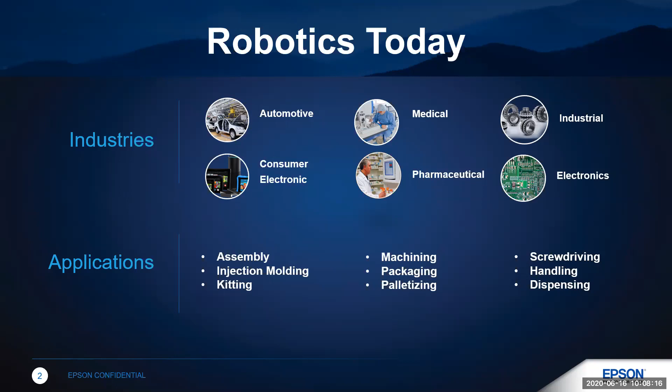And if you're going to assemble something, you have to have parts, right? You can't assemble something without the parts. So that gets us into this question of why are you talking about parts feeding? Well, in a nutshell, all different parts or products that are manufactured are made up of smaller components or parts. In order to make these products, you need to pull in the individual parts and assemble them in some way. So if you want your automation process to be successful and efficient, you need these components available for quick access, and they've got to be available in an organized fashion.

If we use, say, an example cell phone, there are literally hundreds and hundreds of parts required to build that cell phone. Same thing goes for pacemakers, hearing aids, or even hard drives. In all cases, there's typically a lot of different parts required, and the parts need to be presented to your robot in an organized and consistent position so the robot can go in, pick up the part, and do something with it. This process of making parts available is called parts feeding. As I mentioned when I started this presentation, parts feeding is one of those things you just take for granted, but it's a vital topic to automation. So this is what we're going to be covering today.

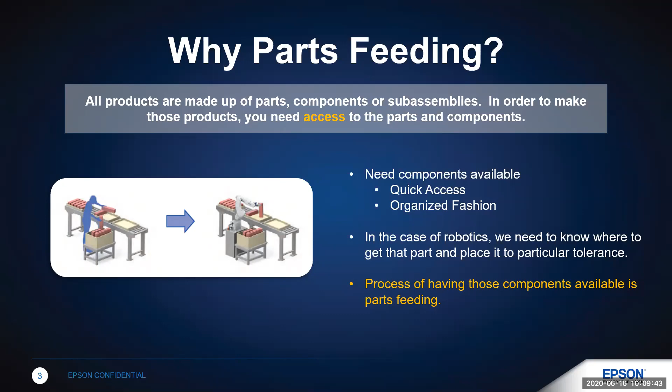Before we dive in deeper, it's important to talk about one aspect of parts feeding, a term known as singulation. During a manufacturing process, often you'll receive something like a big bag of parts. This bag of parts might be useful to a human. You receive this and use your hands to open the bag, then use your eyes and fingers to find a part and pull it out one at a time. Then you use your fingers to orient that part and do something with it, and then you go off.

At a high level, applying robotics to this process is really no different. Yet to start, typically what's required is the singulation, or separation, of all those parts from the bag. You've got to make sure they're separated. Once separated, they can be individually found with a vision system or machine vision, or they can be singulated using bowl feeders so the robot can go in and pick up the parts one at a time. So when we discuss parts feeding within the context of automation, spreading out the parts so you can access them one at a time is an important concept. This is known as singulation.

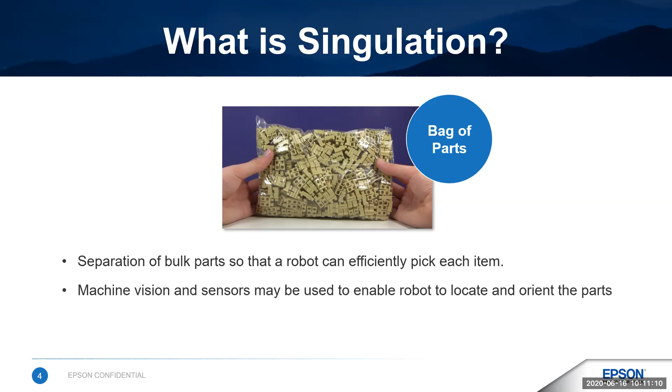Here's where we're going to go in this presentation today. We're going to start off by going through some of the key things you should consider when selecting the right feeder for your application. Next, we'll talk about the different kinds of feeders. We're not going to cover all of them, there's a plethora of options out there, we'll just cover some of the more common feeders used today. Third, we'll cover some of the trends driving parts feeding today and what we've been seeing at Epson. And finally, we'll provide you with some guidance on how to get started.

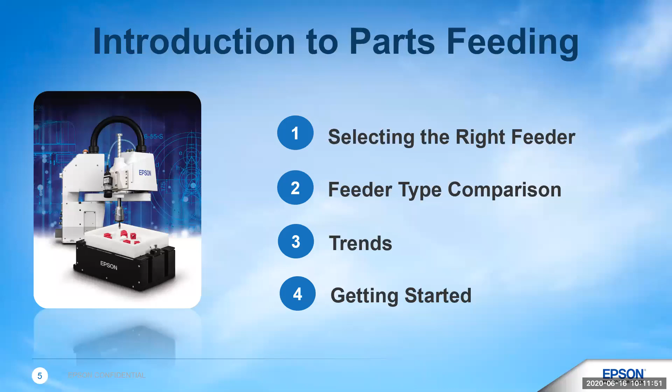So first topic, selecting the right parts feeder. For this topic, we're going to take a look at and give you 5 key areas that you need to consider as you begin to think about which feeder you want to use. These are important considerations because there are definitely a lot of choices that are out there.

So it's important to do your due diligence up front. And in no particular order, you want to be thinking about what's your part type? What's that part type's complexity? What are the future needs for your parts? Don't just think about now, but be thinking about 3 years out, 5 years out, 10 years out. What's your part mix? A big part of what we will address is volume versus variety or changeover.

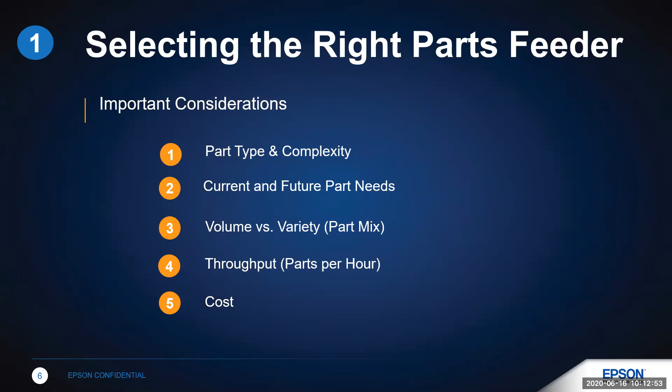And that brings us to throughput. How many parts do you need in an hour? And of course, last but not least, there's always cost. So you're always thinking about the cost of the system and your ROI.

All right, so part type and complexity. Some of the things that we want to think about when considering part type and complexity is, what is the part? Is it a simple part with, say, 6 sides like a block? Does it have multiple sides that the part can fall on when fed? What's the part length? What's the part width? What's the thickness?

How about the material? Metal parts are, of course, a lot heavier than plastic parts. So moving them around in whatever feeder you have takes more effort. Rubber parts, as another example, they can tend to stick together and can present movement problems on a vibration tray.

The slide here lists out just a few examples of parts. And as you all know, there's a gazillion parts that are out there, all sorts of different types, fasteners, clips, and connectors. But here's the thing you really want to watch out for. Things like clips or parts that have different kinds of grooves or protrusions can potentially get stuck or bind together.

And remember the topic we started off with, singulation. It's really key. You want to be looking at your parts through the lens of singulation. Can you separate the parts out?

Simple parts, so take, for example, that block, have typically very fast throughput. More complex parts can be a little slower and sometimes require special tooling or take some special setup. When we start to look at part complexity, such as a part with protrusions, this can cause the part to have multiple possible orientations. That can impact singulation.

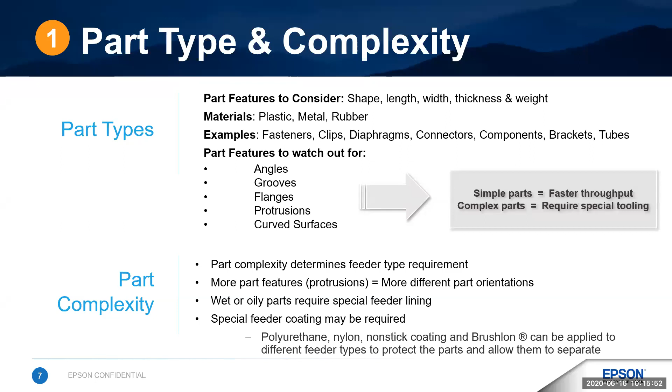So an important takeaway here is make sure when you're looking at all this and you're considering part type and complexity that whoever you work with, whatever robot vendor or parts feeder supplier you have, will go ahead and take the time to give you that confidence that you will be able to singulate those parts. It's an important topic I'll come back to later, but make sure that you do the testing and make sure whoever you work with helps you with that.

Next, you want to consider both your current and your future part needs. This is really something that you want to think about when you're considering your feeder type mechanism, because you're going to spend some money on this. You're going to have some investment in time as well. So what's important here is not just to think about what you may need for the next, say, 3 months for a given project. Think about what you might need down the road several months later.

So let's bring back the cell phone example. As you all know, probably all too well, cell phones transition quite a bit, right? It seems like every 6 to 12 months, you got a new cell phone coming out, new version. So after a period as short as 6 months, you will likely need a different set of parts for that cell phone.

You don't want to get a feeder that you end up having to throw away or not be able to use a year later. Ideally, you want to get the maximum use out of your feeder investment. So make sure you think about your current and your future part needs.

You also need to consider high product mix that requires high changeovers versus having parts that you will just keep making over and over the next 5 to 10 years. If you're in the automotive market, for example, the typical trend is that they will make the same part for 3, 5, even 7 years.

But in the electronic space, there's a much quicker turnover or changeover in the products, where every new product is introduced with new parts. And those new parts need a feeder. That feeder either needs to be new or needs to be adaptable so that you can adjust to the changing trends in your parts.

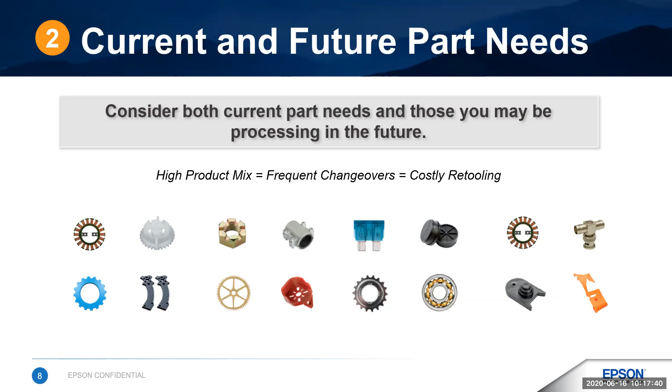If you have a high part volume and a low part mix, then very commonly a bowl feeder will be used. They're very quick. On the other side of the spectrum, if you plan to change parts every 3 to 6 months, like that cell phone example, we even have customers changing weekly, things we see with our applications department here at Epson. Then a flexible feeder might be the better option.

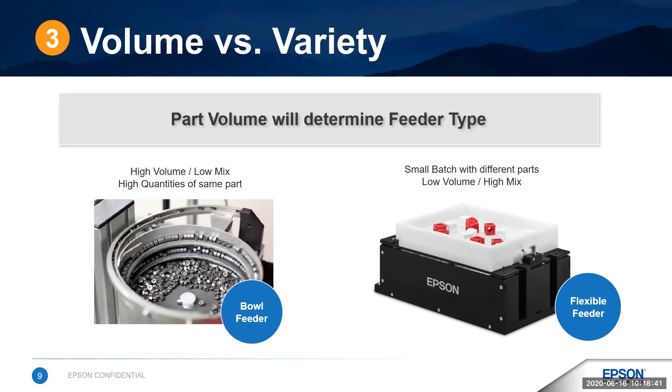So as I mentioned, we'll get more into depth into each one, but just think about what your volume and your variety mix needs are when you're considering your feeder.

Now let's talk about throughput. Here are some of the trade-offs to consider. We talked a lot about this in our Automation 101 presentation: cycle time or speed, precision, and flexibility.

So in making those trade-offs, you want to make sure you think about what is your highest priority. And that might vary application to application.

So let's say, for example, that your highest priority is the creation of 1 million parts per week. You therefore require that throughput be very fast. Additionally, in this process, the precision for the product relative to some other applications you might be working on is not as critical. So you, as a builder or as a customer, are able to reduce precision for the benefit of increased speed.

Finally, you need to think about how often you will be doing changeovers. Different parts may require different throughput and precision levels. That is the flexibility part of the equation. So be thinking about these 3 elements and what your needs are.

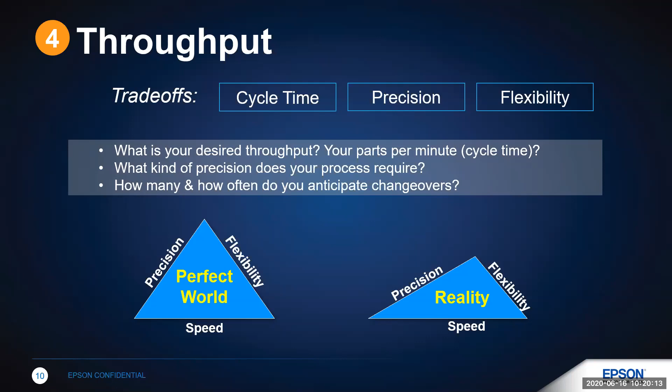Last consideration in this section, and as I mentioned, last but not least, is cost or total cost of ownership. Let's say, for example, we're building a generator. The generator's got 9 different parts that are required to build this generator, and so we have 9 different parts and we need to feed those.

If we're using bowl feeders, for example, bowl feeders can range $20,000 to $40,000 a piece. So if we use the low end cost there, we might be spending upwards of $180,000 for all those bowl feeders. If we're required to build the same product with the same parts for the next 5 years, and during that time we have to build out millions and millions of the same generator, the bowl feeder is definitely the way to go here.

However, what if we need to change these parts every year or every 6 months? And when things change, maybe the screw type is going to change. Maybe a gasket will change. Maybe some other piece will change at some point.

And so when this happens, we will very likely need to take the bowl feeder out and bring in a new bowl feeder, and that will cost us even more money.

An alternative option is to use a flexible feeder. In using flexible feeders, we can make a little programming change for the vision system to find the new part, and now the robot will be able to pick up the new part. This presents a flexible solution without the big cost of purchasing a new bowl feeder each time you have a new part.

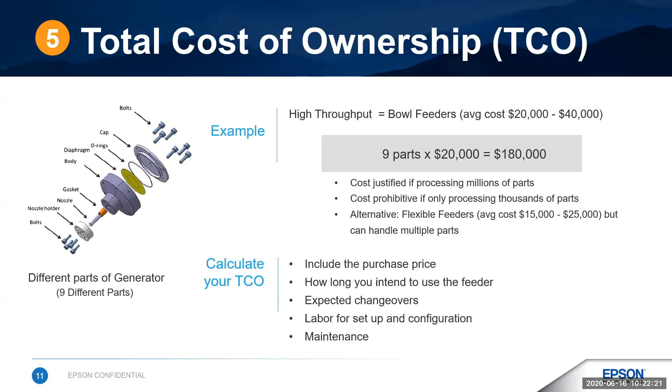So when calculating your total cost of ownership for your given application, make sure you include all these different factors. Make sure to include not just the purchase price, but factor in how long you intend to use the feeder, how often you will change parts over, or how often you'll have some sort of changeover occurring. Some feeders take more setup, some take more maintenance than others, so don't forget about those costs as well.

All right, so those are things to think about as you look at feeders. So in the second section, we're going to take a look at some of the different feeder types that are out there. And as I mentioned, there's a lot, right? So this is just some of the more common ones that we see.

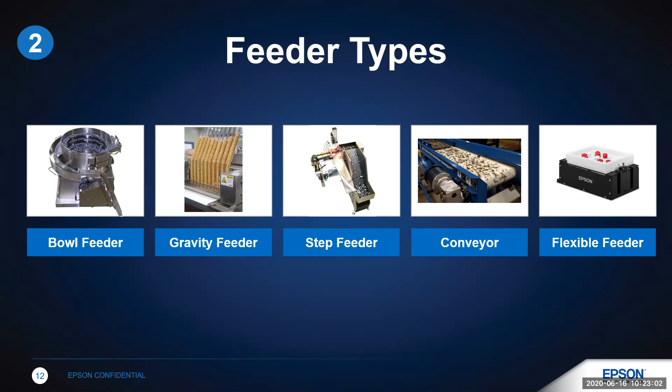All right, so first off, bowl feeders. Bowl feeders are definitely the champion when it comes to making sure you have a part available so that the robot can continuously assemble or continuously do something with that part without any lag in time. Bowl feeders typically work through vibration. So parts are dropped into the center of the bowl and they vibrate around the outside along a track.

Bowl feeders are custom made by literally gurus. Folks have been doing this a long time that really understand how to make the parts fall back into the bowl so that they were properly oriented when they are fed and presented. The beautiful thing about a bowl feeder is that there is always a part waiting for you. As such, the robot can have very quick cycle times.

However, in terms of cost, bowl feeders are more on the expensive side. They have to be made custom. The changeover is okay, but you do have to move from one bowl feeder to another as each feeder is made for a specific part.

So this brings us to part mix. Again, a bowl feeder typically works with one part. And here's where the problem comes in. If you have to change that part just a little bit, oftentimes you have to change the bowl feeder. So if you need super high throughput, bowl feeders are the best option.

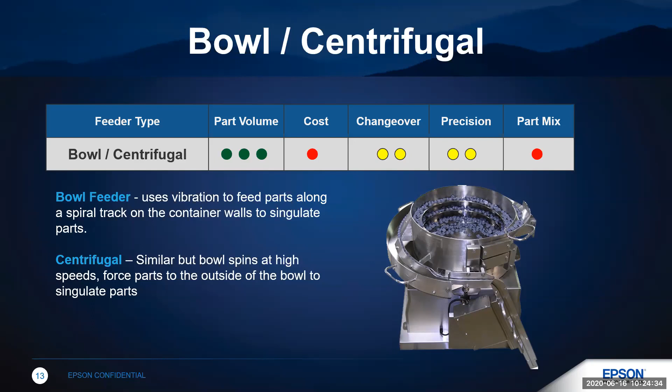Parts get dropped down and then they sit where they lie. But if you're doing a food application where changeover, precision, and part mix are not a super high criteria for you, a gravity feeder might be something to consider.

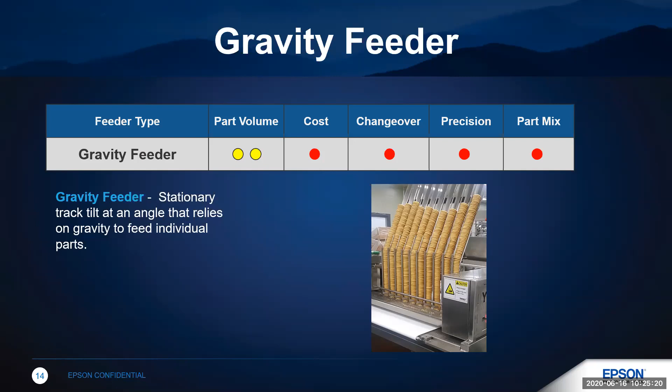So third, let's shift to step feeders. These are typically used for bringing up bulk parts. So you're not typically singulating down to one particular part. You are more pulling out a bunch of parts at one time. Step feeders are used to pull parts up to a vibration feeder or possibly a conveyor.

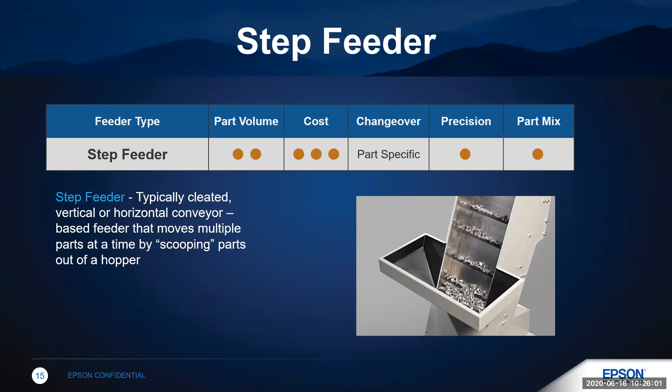Changeover is an area that conveyors really excel at, because you can change parts from part A to part B very easily, as long as you have the software already in place for the vision system to identify and pick up the new parts and the required grippers. So on the changeover and part mix side, big thumbs up for conveyor tracking.

Excellent solution. In terms of part volume, you will need to go a little bit slower versus a bowl feeder, because you are picking up parts off a moving conveyor belt. One of the things you give up as well is precision. You can fix that by adding an upward camera. You can pick up the part and move it over the top of the upward camera to see where it's held by the gripper and then go and place it, which would certainly help with your precision.

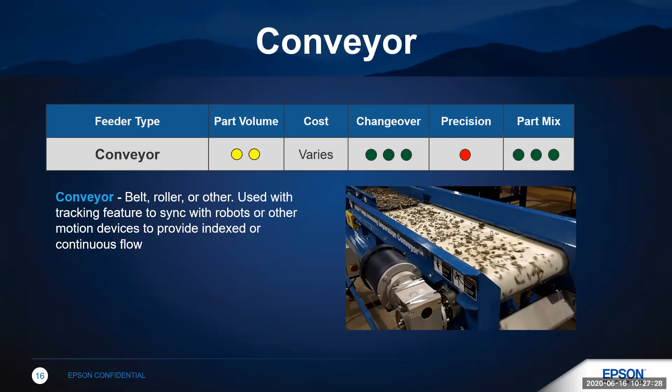However, even with that, one of the disadvantages is that the part volume does not compete with bowl feeders. Bowl feeders are usually the speed champions, while flexible feeders are better at handling changeover. Cost is also an advantage, as you can use the same robot, the same vision system, and the same flexible feeder for multiple projects.

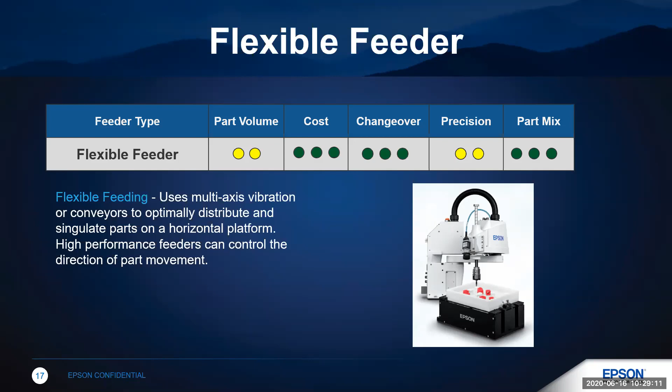So in summary, here's a high-level comparison of the different types of feeders, things to think about as you evaluate your projects and what you need. Bowl feeders, as I mentioned, do very well with throughput and precision, but have disadvantages in terms of cost and part mix, as they can only work with one part.

Gravity feeders are average with throughput and cost, but are still very specialized types of feeders. Step feeders are more for moving a lot of parts at the same time. Conveyors are used in a lot of applications—changeover and part mix are excellent, throughput is good, but not necessarily as good as a bowl feeder. And finally, flexible feeders excel when you have high part mix and low part volumes. You'll give up a little on throughput versus the bowl feeder, but where it gains is in changeover and part mix.

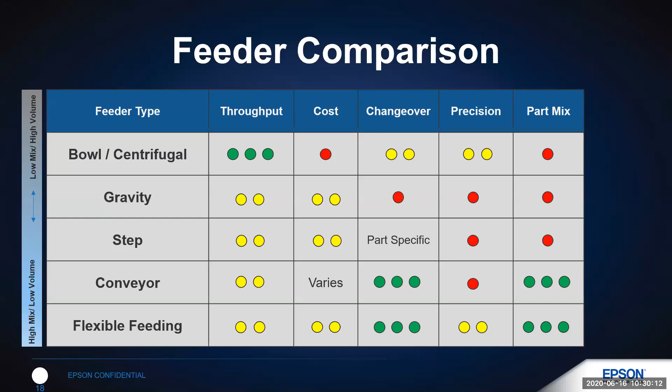All right, trends driving flexible feeding. I want to cover some of the things that we've seen, some of the things that probably you have seen as well, and considerations as you move into the space and look at your different options.

Flexible feeding is becoming much more common today versus say 10 years ago. One of the factors driving this is mass customization, and we're seeing much shorter product life cycles than we did 10 years ago. Products, if we're looking at that cell phone example, might be 6 to 12 month runs, and then the product changes—maybe a different color, a different configuration, or a different size. Cell phones are a really good example of mass customization, changing with high frequency.

Unique products like this with shorter cycles are what's really driving that need for flexibility in your automation.

Another trend is miniaturization. We are continually making things smaller and smaller. Think about a car cell phone from 25 years ago versus what we have today. I have visions in my head of Gordon Gekko in Wall Street walking along the beach in the 80s with that gigantic cell phone, right? And think about what you have today with your Bluetooth headsets and all that. Dramatically smaller.

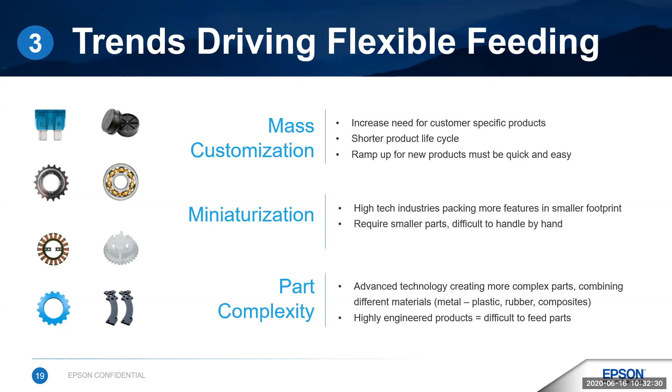Another area is part complexity. This is also a key factor driving change in this area. Complex parts are difficult to move through bowl feeders. In many of these cases, the flexible feeders are able to singulate and separate out the complex parts, find them with a vision system, and pick them up for assembly with a robot. So people are moving towards the flexible feeders in that area.

All right, so let's talk about getting started. So far in this presentation, we've laid out considerations, things to think about with your parts. We've laid out the different types of options available to you, and some of the trends happening in this area. So as you begin to put together what you need for your particular application, start thinking about the essential components you will need.

Will you need machine vision or not? How do you optimize your parts for feeding? What are some of the landmines or problem areas to be on the lookout for? And then finally, how do you put everything together? How do you integrate all this stuff?

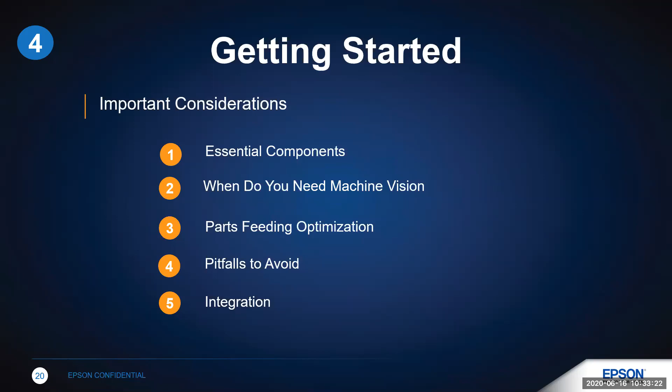The same general setup is true if you're using a bowl feeder. With a bowl feeder, you'll drop all your parts into the center of the bowl, and then they'll vibrate around the edges all the way around to the outer edges along a ridge until they're all the way out at the top. In both cases, you will have a hopper and a feeder. In the case of the bowl feeder, the hopper is built into the bowl feeder.

Then you will need a motion device, something to pick up and manipulate the part. You can use a robot, such as a SCARA, a 6-axis, or Delta robots. There are many options to pick up the parts and place them for assembly. SCARA robots are best for fast cycle time or super high precision. This is an area where Epson really excels, and we can definitely help you with that.

Do think about payload requirements. Payload is not just the weight of the part, but also the end of arm tooling. So don't forget to evaluate both when considering your payload requirements - real important piece of information there. And finally, you'll need a robot controller. The robot controller can control all components, or you might want to drive this through a PLC or some other mechanism. So essential components: feeder, hopper, motion device, and controls.

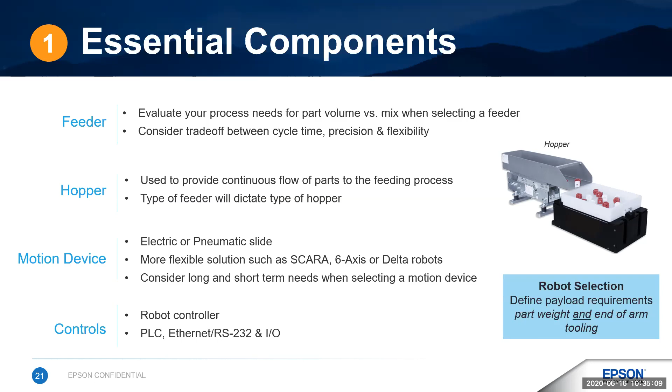So when do you need machine vision? Typically, flexible feeding and conveyor tracking requires some sort of machine vision. There are exceptions, as sometimes conveyor tracking can be done with other sensors, but usually you've got some sort of vision system in there. Machine vision is used to find the parts - think of this as the eyes of the system. And as such, it's critical to be able to find different parts. It's also critical to make sure you singulate the parts - that's where vision comes in.

If you have a high mix of parts, the vision system can definitely be programmed to detect part 1, part 2, part N fairly easily.

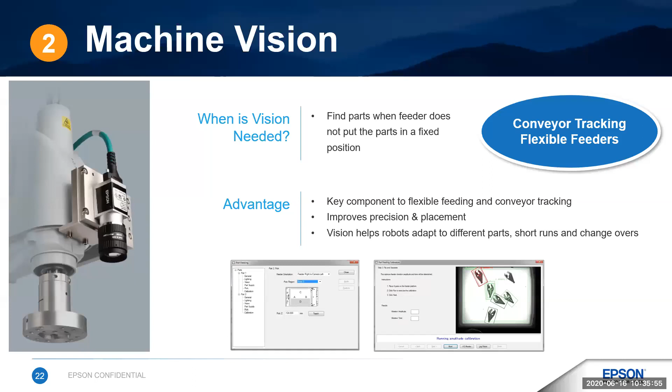So let's talk about feeding optimization. There's definitely a couple key areas to consider.

The first area is what we'll call staging, or a staging/preloading area. This is done in cases where you need a continuous cycle, where you need to hit a certain time every time. Let's say you need to place a part every 2 seconds. If your application is running an average cycle time of 1.5 seconds, as an example, most of the time you're not having any issues.

But what about during the time the hopper is putting more parts into the feeder? During this time, you have to wait for new parts to be loaded and time for the parts to be singulated before you can pick them out. Maybe this takes a few seconds. Since you can't miss placing a part—remember, you've got a cycle time expectation of 2 seconds—this is where staging comes into play.

So one way to leverage this idea is to build a staging area in your system with 5 to 10 part nests close to the feeder. Before you start your complete system, let the robot and feeding system preload the nest positions. Now that you have, say, 10 parts in the nesting positions, each time your hopper needs to load more parts, you can have the system pull parts from the nesting positions to make sure you hit your 2-second cycle time. Then during the regular cycles, when you have extra time, you can reload the nesting positions in between placements.

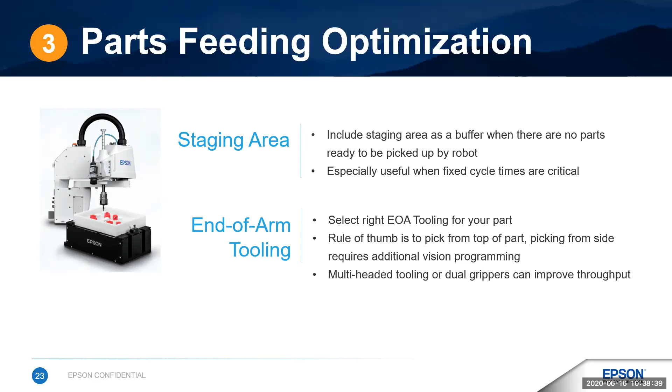All right, pitfalls to avoid—things to avoid, or at least be cognizant of. As we discussed up front in this presentation, you always want to consider your part features like shape, length, and width, and look at them through the lens of singulation. Will those parts easily separate out? Do they have the potential to bind together?

Here we've listed in the box some very common example parts. Springs in general can be very difficult to separate out. Extremely thin parts can be difficult to singulate. Soft and flexible parts that can change form can sometimes present challenges. And round parts that roll around can be difficult to stop.

There are multiple solutions to all of these, and there are options. Epson, with our application engineering team, can certainly help you with that and give you some guidance. Part complexity is also another area to consider when looking at pitfalls to be cognizant of. The more complex the part, the more difficult to singulate and feed.

But the most important takeaway I want to make sure people take away from this particular slide is to test your parts. Before you buy the components, before you buy the feeder, test your parts. You definitely want to work with a company like Epson or Feeder Expert to guide you through to the right solution.

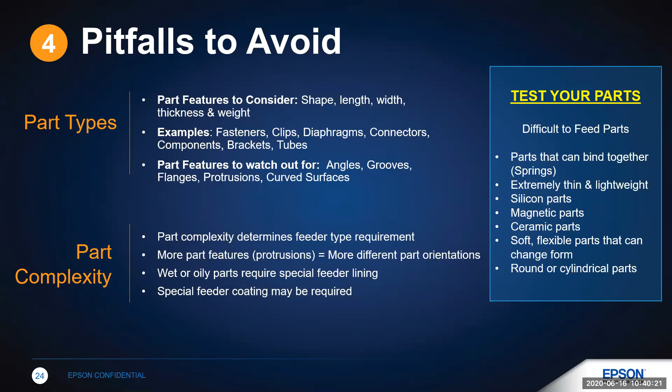Another pitfall is not knowing your priorities. You need to determine upfront whether cycle time is needed or flexibility. Understand the trade-offs—that perfect world doesn't always exist, and you might need to give up something in order to have another aspect of your application be optimized.

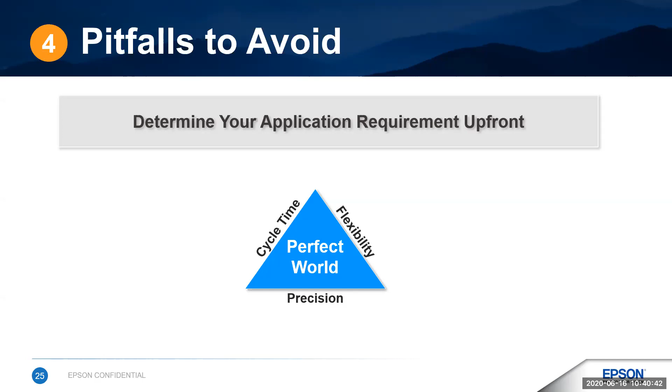As I show in this example, sometimes cycle time is more important, sometimes flexibility is more important. If cycle time is a top priority and not parts changeover, then a bowl feeder might be the best option. But if flexibility is key and you have a high mix but low volume part need, a flexible feeder can be the way to go.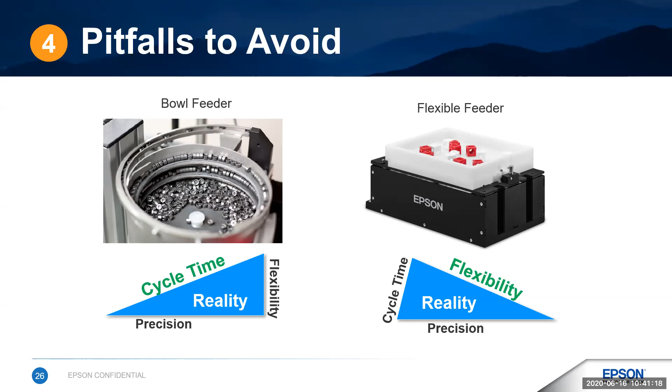Sometimes it's not straightforward, so I recommend you talk with your robot or feeder vendor for the best option. And always, always test the parts before you purchase the components.

Another pitfall to avoid is fixed cycle time versus average cycle time. Fixed cycle time is common with rotary indexers or with 5 or 6 stations, where each station has to do something. Imagine a part that has to be assembled every 1 second - you need a part every 1 second, not an average of every 1 second.

Then there's average cycle time, which is the average over a large volume of parts. Let's say you need to hit an average of 1 second, for example. The two applications are very different. The benefit of flexible feeding in this example is that flexible feeders can accommodate both scenarios.

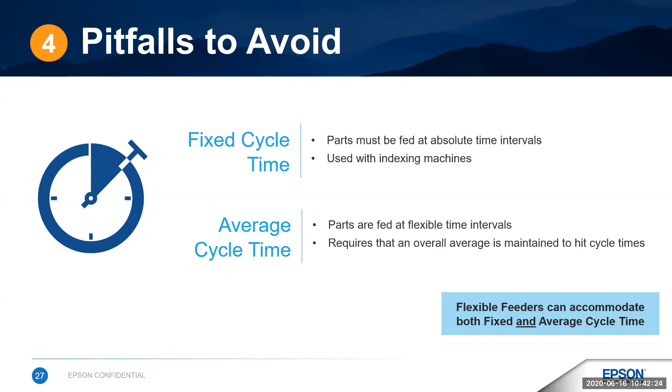And as I mentioned earlier with optimization, things you can look at - staging or end of arm tooling - can also be implemented to help hit your required fixed cycle times when you've got those continuous parts feeding requirements.

So then finally, who will build this? The great thing is we're on a call with a lot of great builders here at CSIA, people that really understand automation, are wizards at putting things together. And so for the end users out there, for people that haven't been in automation before, this is something new you haven't worked with before - think about who will do this work.

Do you have the resources in-house, or a robot expert? Who's going to be the person that's going to lead the charge on assembling all this?

Bowl feeder integration is fairly easy - connections are just an I/O, input/output. There is more work required for flexible feeders, and that can range from difficult to easy because it involves multiple components: a robot, a feeder, and vision. The integration level, therefore, depends on which type of feeder you use.

Epson introduced the IntelliFlex feeding system, which has an intelligent feeder and can move parts in an intelligent way, not just shake and pray. Because IntelliFlex is built with Epson Robots, feeder, and vision all integrated together, parts feeding has now become much easier with much less development time than putting all those separate components together on your own.

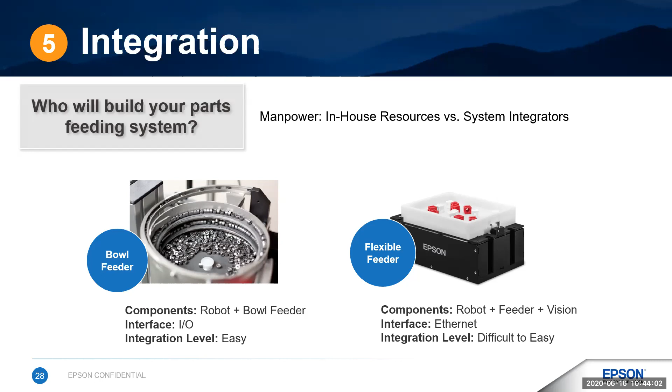I appreciate everyone's time. We covered a lot of ground here, went through a bunch of good topics that I think sometimes we take for granted. But parts feeding is vital to any automation environment you're in. Hopefully this gave you some good nuggets of information to think about as you move forward into your projects. So what we covered: parts feeding is required for most assembly applications.

It's out there - make sure you think about your current and future needs and what parts you have. Consider all those aspects. There are many different feeding solutions available depending upon your part needs and requirements. We went through 5 different options, but there are others out there. Be thinking about what your needs are and which one matches up the best.

We talked about the trends happening in parts feeding - mass customization, miniaturization, and parts complexity. They're all driving that trend, and we're seeing the uptick in flexible feeding as a result.

Be cognizant of the pitfalls out there and how to avoid them. I mentioned a few, there are others. Work with somebody who's an expert in this space, and they can really guide you through other considerations for your application. And then finally, most importantly, test your parts. Don't just take folks' word for it that this is going to work. Test the parts. Epson Robots is more than happy to help you in this area as your needs come about.

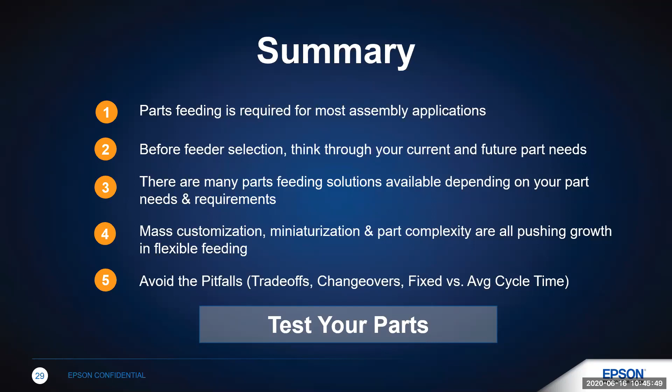All right, Scott, I'm happy to report we have some questions. Let's begin with: which feeder type is best for parts assembly that involves a high mix of different components?

Yeah, we talked a little bit about this. This is really where flexible feeders come in.

So flexible feeders, as I mentioned, use vision to differentiate or singulate out parts. Having parts separated is kind of the name of the game with this, right? You need to be able to identify those parts and move them apart, whether it's a spring, a nut, a screw, whatever. The vision system is really what helps to differentiate what you have. It helps to identify the part that the robot goes in and gets. So it's a combination of those different parts, and flexible feeding really is the way to go in that particular environment where you have a mix of things.

Okay, thank you, Scott. How do I know whether the feeder can accommodate my part? I mentioned a few times throughout, and I think it's important to reiterate, whether you're looking at a gravity feeder, a bowl feeder, or a flexible feeder, you have to test it. You have to make sure you put it through its paces, because you're going to spend money, time, and resources bringing it in and implementing the solution. So you want to test it and make sure that it works.